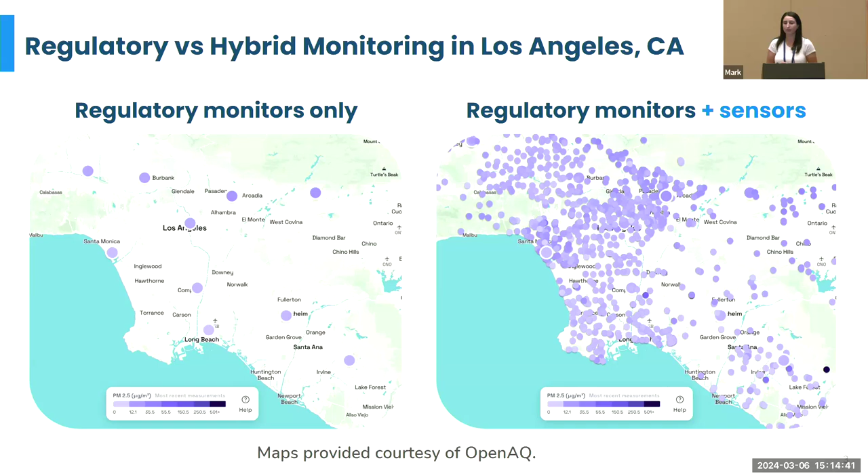So all of the variables here are extremely important, but in particular for airport monitoring, the big one that's important is the pollutants of interest. So a lot of low-cost sensor monitoring is very focused on PM2.5, which is one of many pollutants that are emitted from airports, which I'll talk about on the next slide.

But there are other variables to consider when you think about monitoring, particularly around airports. One is location feasibility. So do you have access to the site that you want to monitor? Is it a residence or a school? And who do you need to get permission to do that monitoring?

Budget is also a big one. Whether you're a government agency or a nonprofit, it is important to identify what your budget is, and that's going to help you determine not only how many monitors you can buy, but what pollutants you can actually measure.

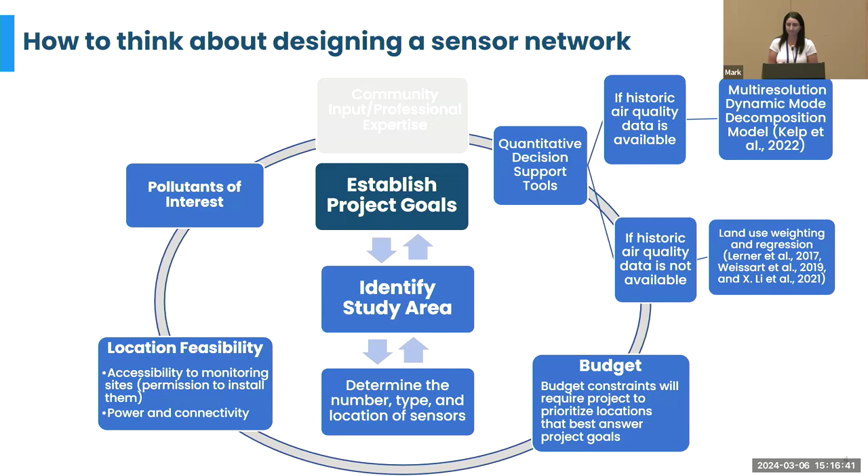So when we're thinking about airports, it's important to identify what the sources of the air pollution are from these airports. The most obvious one to everyone is probably aircraft, but when we're thinking about air quality as a whole, we also want to think about vehicular traffic, whether that's passenger vehicles coming in or any ground support equipment. We also want to think about any transportation on the runway and externally. And then you also want to think about any APUs, basically any type of units that are going to emit air pollution.

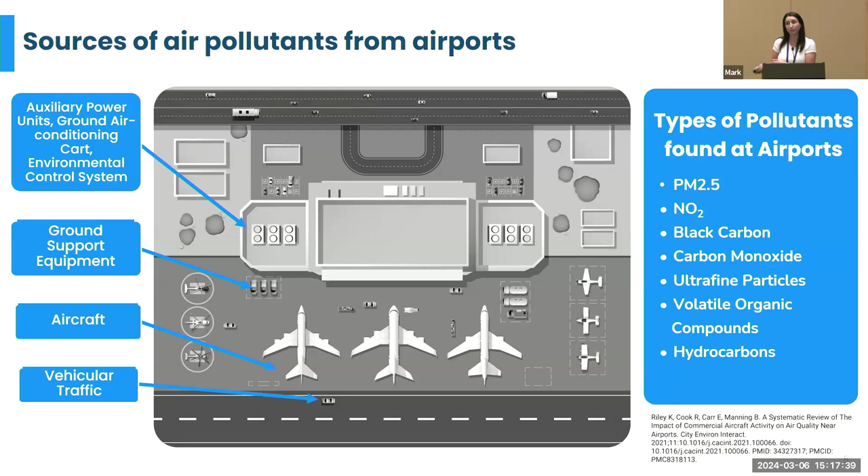So the company I work for is called Clarity, and one thing that we really work hard to do is make sure that monitoring technology is accessible and easy to deploy. So one other thing to think about when you're setting up a network is to make sure that the monitors are easy to deploy, you don't have to get a lot of permission to install them, etc.

And then thinking even beyond just the monitor itself, we've also thought about adding additional pollutants that are newer now, I would say, in the low-cost sensor space to monitor. As I mentioned on the previous slide, there is a very long list of pollutants that even Clarity doesn't cover that are being emitted from airports.

So some other things that we also include in our platform are wind modules. It's important to understand wind speed, wind direction, temperature, and relative humidity when you're talking about air quality. You want to know where it's coming from, where it's traveling to, et cetera. And then pollutants like ozone and black carbon are also important, because relying on PM2.5 when you might need to be monitoring black carbon is an important factor to consider.

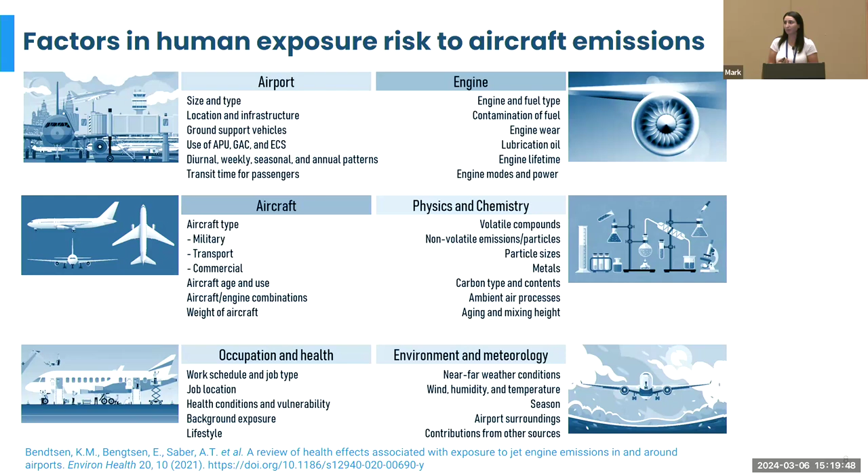And then I just want to finish off with some pros and cons of using low-cost air monitors for airports. As I mentioned earlier, this really increases accessibility to non-air quality experts. Having technology like Clarity allows community-based organizations to take matters into their own hands and really understand their air quality. The second one, as the name implies, low cost: they are absolutely more affordable than regulatory monitors, which can run in the tens of thousands of dollars range.

Low cost sensors run anywhere from in the hundreds to 10,000 range. So they're definitely a lot more accessible, and again, can allow for more spatial density, which is kind of the third pro of using low cost sensors. You can increase the density of your monitoring to see if there's any type of air quality gradient, right? Like maybe you set one up 100 meters away, 200 meters, 500 meters, and you can use that to measure how far out we're seeing the impacts, are we seeing them at the fence line, things like that.

There are a lot of cons still for using low-cost sensors. So the main one is pollutant types at airports. As I mentioned previously, there is a laundry list of pollutants that are emitted, and not all low-cost sensors can measure all of those pollutants. So we wouldn't want to set up any organizations for a disadvantage. So it's important to be very clear about what that technology is able to measure at this time and what it's not, because although a community may be concerned about what's being emitted at the airport, they might not be using the right technology to measure it.

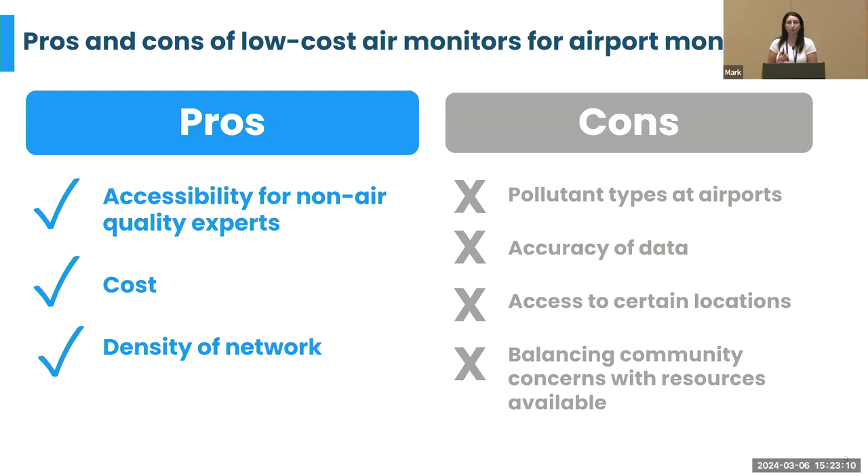And finally, the last one is balancing community concerns with resources available. I think all communities would love to monitor all the pollutants listed, but on a low-cost sensor budget, it's just not feasible to do that. And in fact, there isn't a lot of monitoring for all those pollutants listed that's reliable today, although it is a technology that is emerging. So I think it's important to make sure that we're balancing what the community concerns are and prioritizing those when moving forward in establishing project goals for doing monitoring.

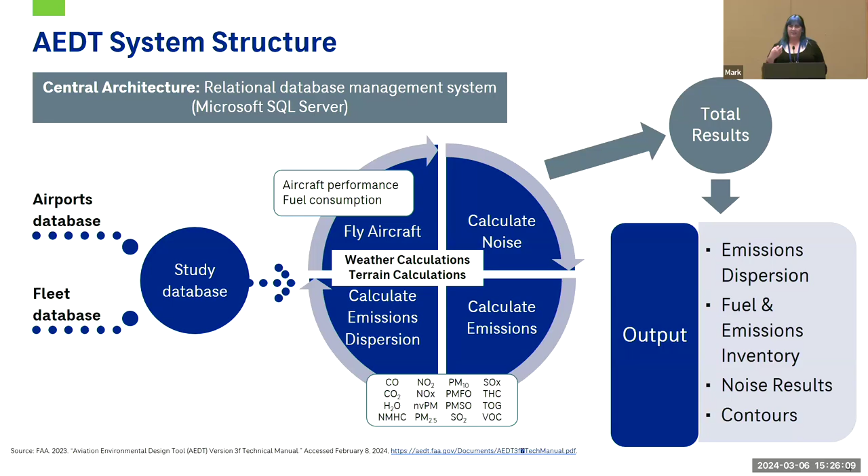So there are a lot of different emission sources at an airport. There's a couple things that AEDT can calculate internally, and that includes the aircraft themselves, the ground support equipment, which is anything that's running around on the tarmac to support the aircraft, and auxiliary power units, which are small onboard engines that help the aircraft operate the lights and air conditioning and other things while it's at a gate. It can also estimate emissions from stationary sources, such as maybe a boiler or a central utility plant to power the terminals, and then area sources such as a fuel farm.

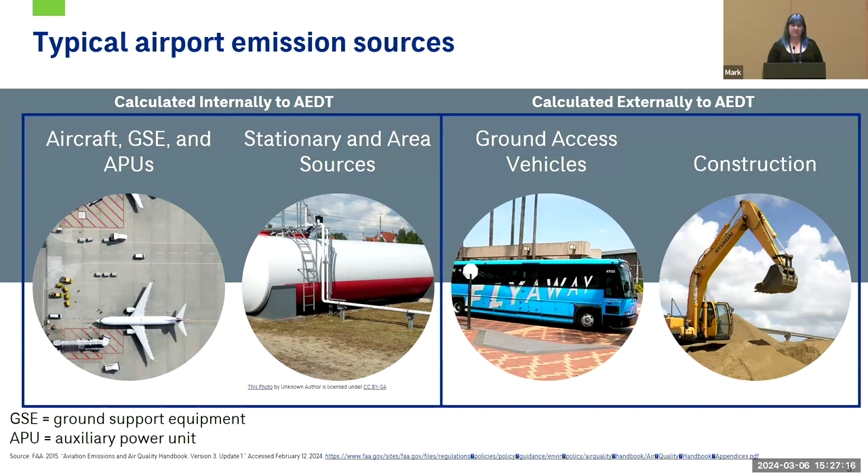What it cannot do internally is look at ground access vehicles, which is any motor vehicle coming in and out of the airport, such as shuttles, buses, passengers, or construction sources. However, you can use the EPA's MOVES model to estimate emissions from those sources, which can then be imported into AEDT.

So I keep talking about what is emissions inventory, and so I do want to spend a brief amount of time talking about what exactly is going into the model to actually estimate your emissions from aircraft. And it's a lot of data. But first and foremost, the most important thing, at least from an air quality or aircraft standpoint, is the actual fleet mix. And so you're actually telling the model the exact airframe and engine combination that you're flying, assuming it's within your database. You're also going to look at the number of operations, how the aircraft is flying, and also how it's moving around on the ground. And then also it's going to pull your non-aircraft sources.

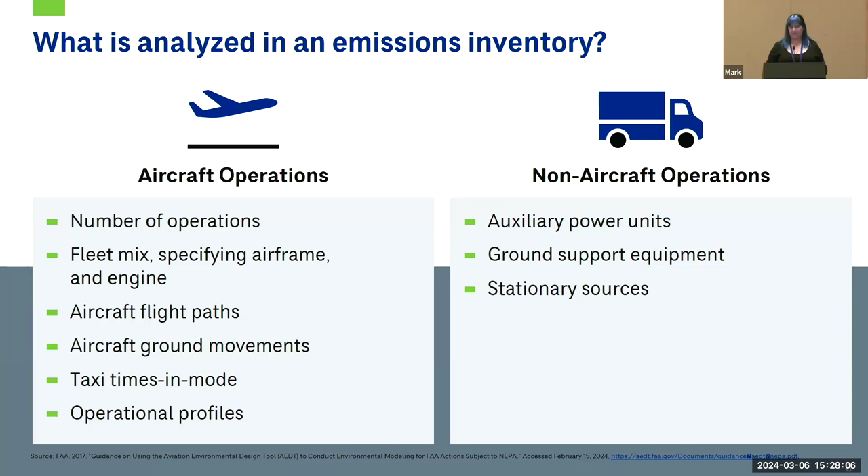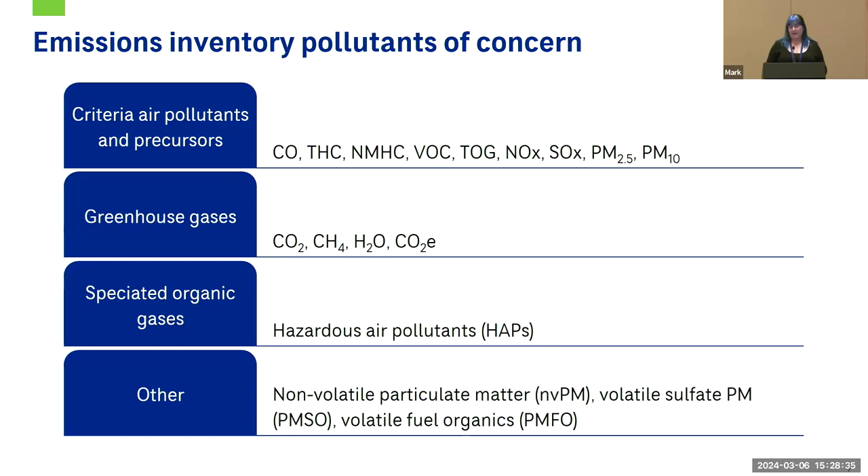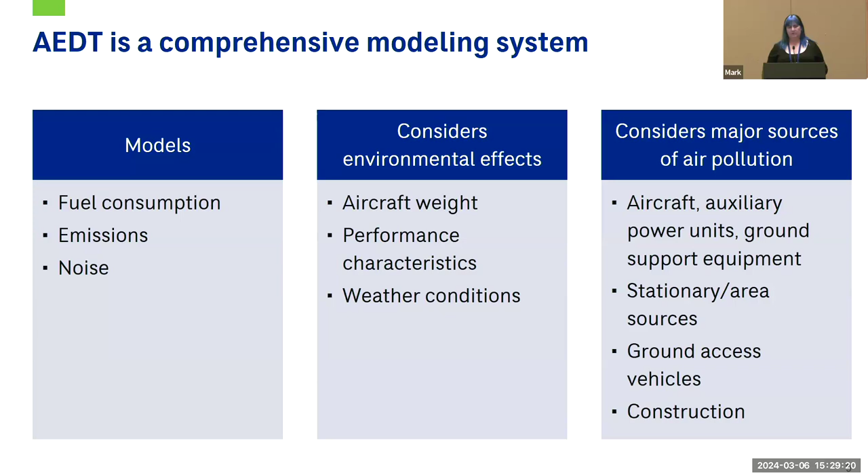AEDT helps with environmental review. If anyone is familiar with the laws called CEQA in California or NEPA, these are requirements to actually look at the environmental impacts of a project at an airport. And so AEDT can help you look at what the impacts of your project are, as well as any alternatives, and if you're compliant with the different regulations.

This was also mentioned briefly yesterday, but it does have some modules in it to look at both nearby environmental justice communities, as well as communities that might have limited English proficiency. And so it does help with communication and outreach. And because of this, it allows for informed decision-making from both the airport and any stakeholders and the community.

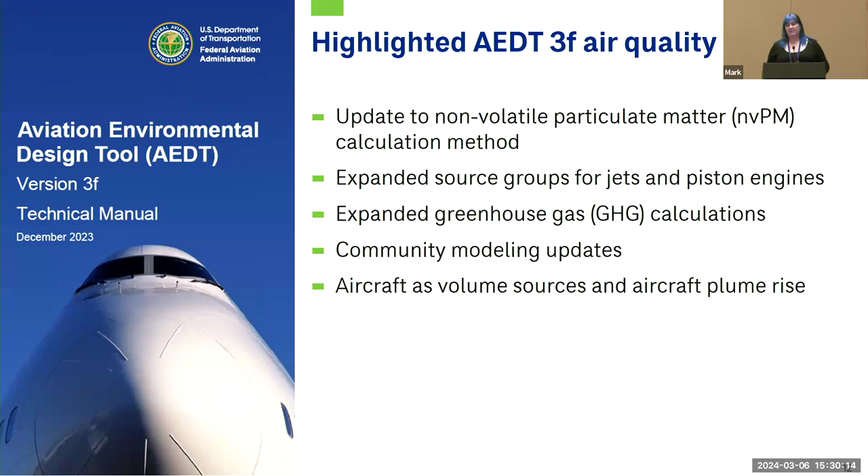So I do want to talk about some new features in AEDT 3F. One thing that may not sound interesting on kind of the outset, but actually is pretty important from a community standpoint, is when you're doing an emissions dispersion study, there's things called source groups. You're kind of lumping different emission sources into these source groups.

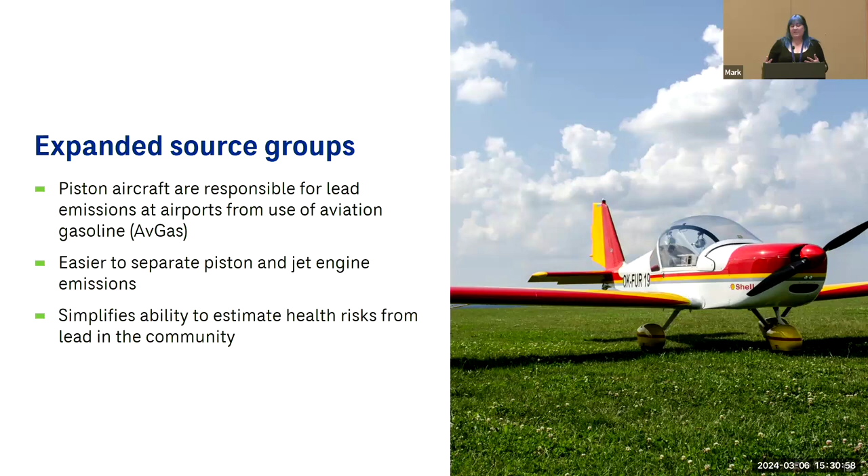And so it used to be you could only look at aircraft as aircraft. But now, with the current release, you can actually separate out your piston engines from your turbine engines. And this is extremely important because it's those piston engines that have your lead emissions. And so this just makes it a lot easier to be able to understand your lead emissions and actually look at it without doing a bunch of other calculations.

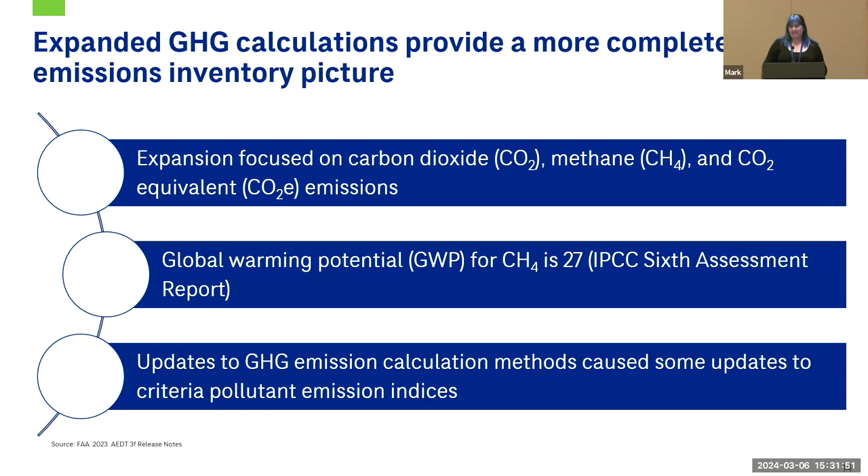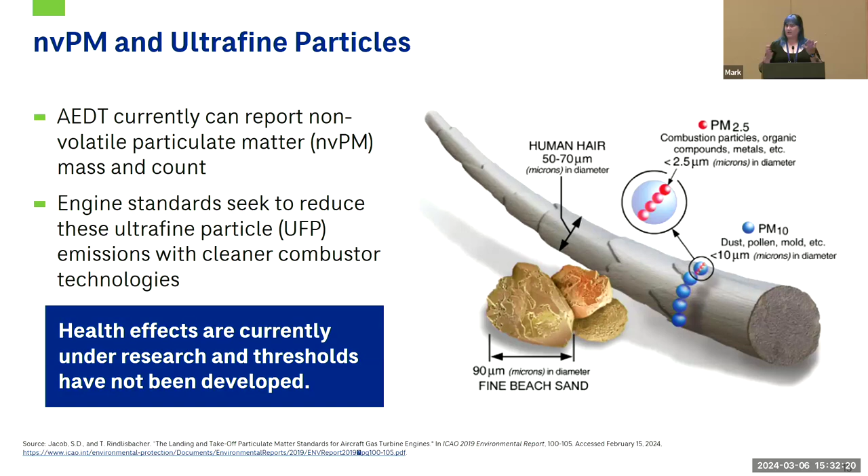Another thing it can do, and actually Kevin Lane's going to talk about this a bit more, is it can look at non-volatile particulate matter, or nvPM. So now it can actually estimate the mass and the count of UFPs. However, while it can give you this data, we don't really know what the health effects are. They're currently under research, and there are no thresholds for it. But at least we're kind of moving in a direction to look at it further.

And so, what are limitations? We just heard Maggie give a great speech on monitoring, and it's very important to understand that modeling does not replace monitoring data. You're looking at a theoretical model of just your airport itself. And so you're not capturing real world emissions, such as a nearby freeway or other emission sources like industry. And so it's possible that your modeled results may not replicate your monitored results. So it's just kind of important to keep that in mind.

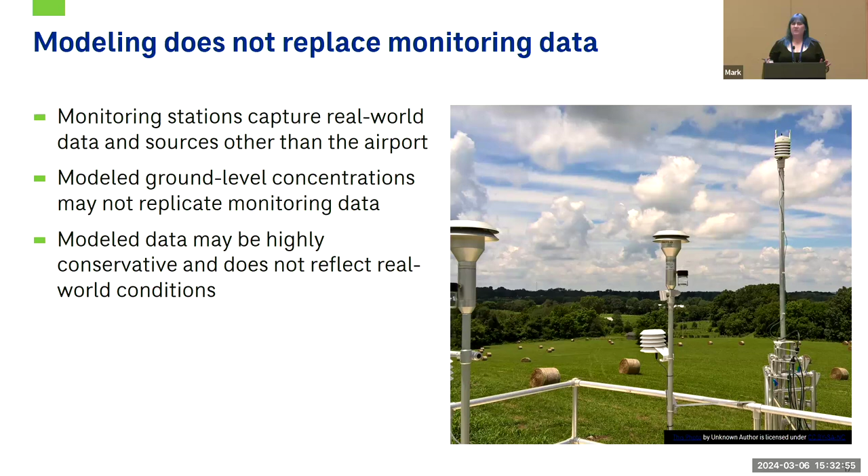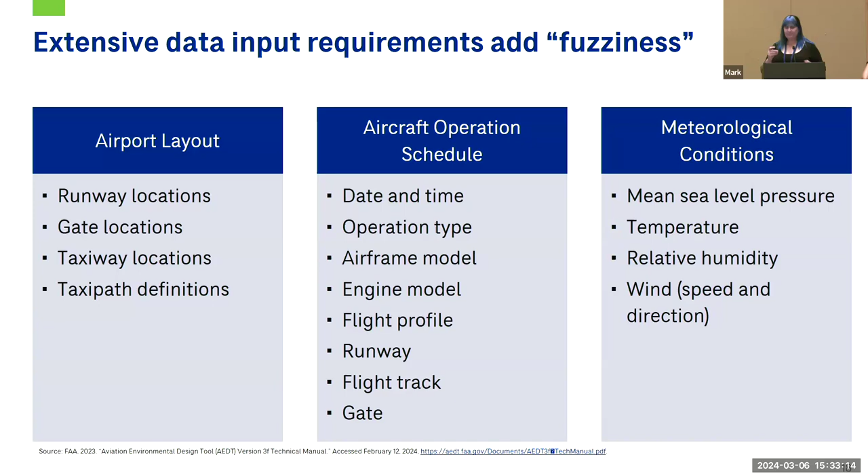There are a lot of data requirements. And so because there's so many different ways you can put in data or analyze it, these kind of slight tweaks might cause what I call fuzziness. There might just be slight variations in your inventory, depending on how the data is input.

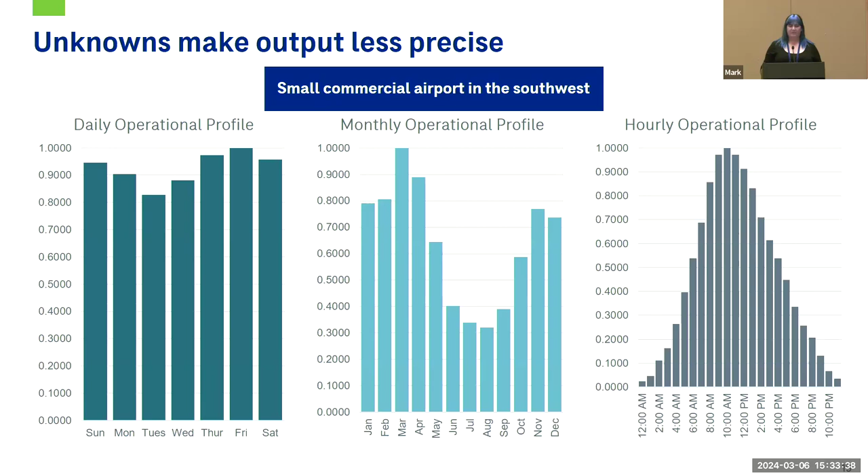There's a lot of unknowns. Often we have to take, say, a daily flight schedule and somehow turn that into annual emissions. And so one technique is to use these operational profiles, which is using historic information from an airport and kind of scaling it up to annual emissions. And so there's a lot of variabilities in that, and so it does make the data a little bit less precise.

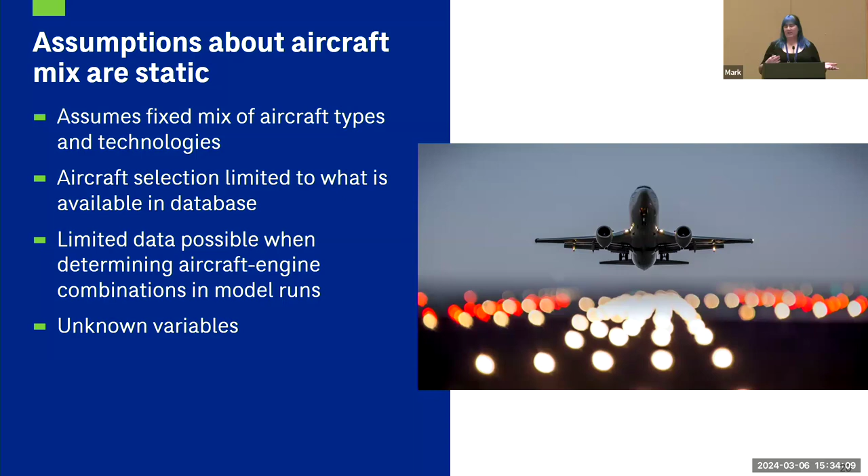The assumptions you put into it are static. Again, you're looking at a database and you're saying, I'm flying this aircraft so many times at this time of day. And so because it's kind of a static picture, there might be some slight differences in the real world. There also could be unknown variables, something like the grounding of the 737 MAX, that may not be captured by your model if you assume those aircraft are operating.

While it's a complex model, it is still simplified in the fact that you're basically looking at emission factors. It may not take into account some real world complexities. You might be having to take data from, say, another model like SIMMOD, which is an airfield simulation model, and somehow interpret that in AEDT. So that, again, is just one more kind of layer that could add some difficulty.

And then just the concept of data overload. There is a lot of data out there now. So understanding what data to actually use and how to simplify it and how to bring it into the model is one thing to consider.

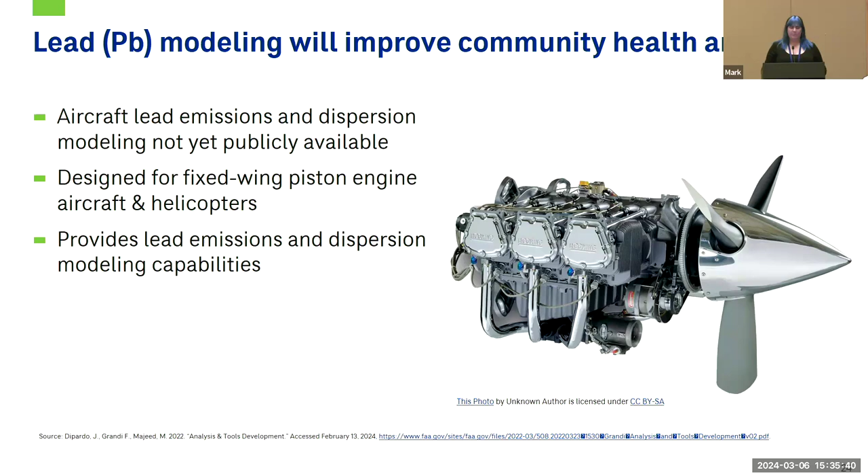And so this is my quick overview of AEDT.

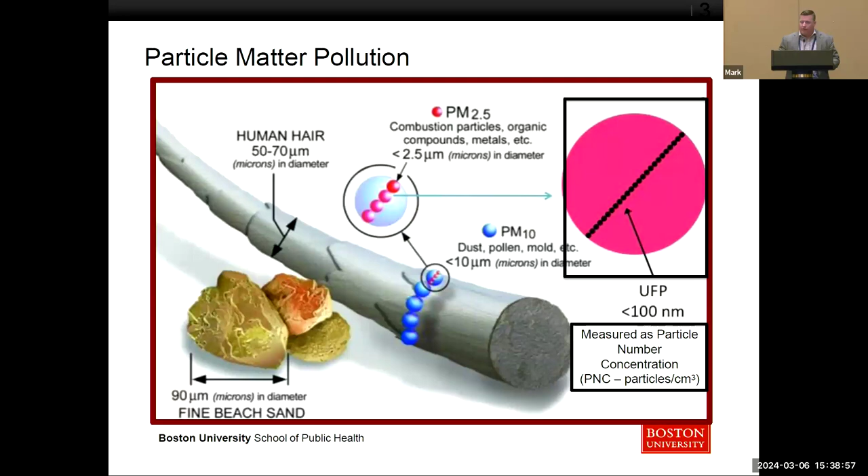And when we're talking about UFP, we're talking about less than 100 nanometers, and most of the health studies have focused on a total look at ultrafine particles, and just now we're starting to get into size distribution. I'm not going to be presenting on those results today, but I will be sharing some of the work we've done on total PNC. And that's also a unique piece, because we're thinking about how we could potentially think about future emissions standards and/or national ambient air quality standards. Thinking about EPA, the health studies are really focused on particle number concentration. The mass, especially in those smaller sizes, contributes really negligibly to a mass-based metric like PM2.5. So it would require a different type of thinking, but it also creates some unique challenges when we want to do monitoring as well as health studies.

Let's see. There we go.

Just to provide a little bit of background. Ultrafine particles are typically byproducts of combustion, have a large reactive surface, and are believed to be more cytotoxic than larger particles. There's also limited lung and systemic removal that can occur. The particles are so small. We heard yesterday, and I'll just reiterate it, the mechanism of action by which we think they elicit adverse health impacts is through an inflammatory response that can occur in the localized respiratory area, with increases in cytokines and C-reactive protein, but they have also been shown to translocate past the endothelial lining of the alveolar region and transport across the systemic circulatory system, deposited in different organs throughout the entire body, eliciting systemic inflammatory responses.

And that's some of the work that has been going on with my group as well as others, and especially the European groups have been leading on some of these areas as well. In terms of epidemiological evidence, until about 10 years ago, it was really minimal in terms of looking at a lot of health studies. And even today, if you look at the EPA's ISA reports that have been coming out, including the most recent one, it's sort of saying that there's just not enough health evidence to support the promulgation of a new ultrafine particle standard at this time.

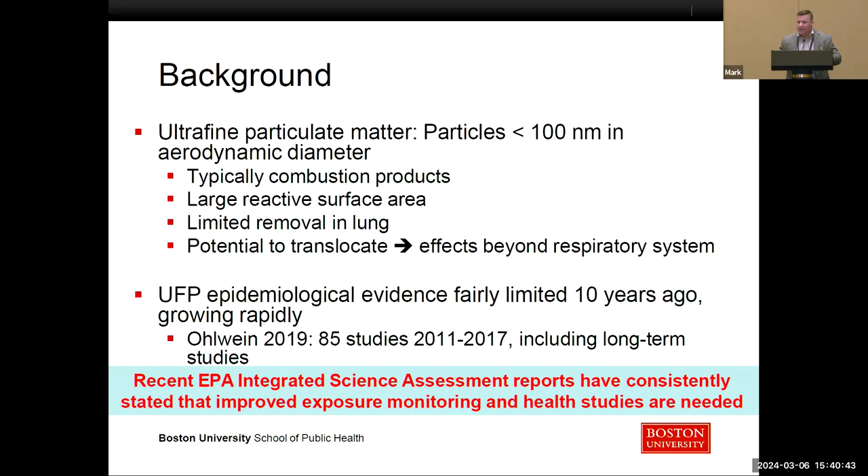Really, the CASAC, when they did their review, were saying that there could be cognitive impacts that could be more potentially on the pathway as suggestive. But when it comes to cardiovascular and respiratory related research, there's a lot of mixed results. There's consistent positive associations on the cardiovascular. On the respiratory side, it's actually quite mixed. And some of that can be due to what exactly the EPA has been saying, and we need more of, which is improved exposure monitoring, exposure assessment techniques, and more health studies overall.

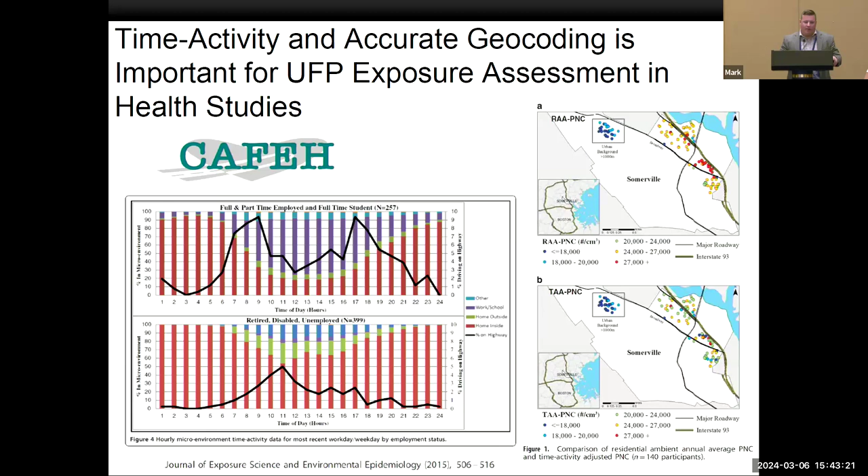The top box on the right shows you sort of a business as usual residential exposure that's typical of PM2.5, which works beautifully because PM2.5 doesn't have as much spatial variation. But with UFP, you're 250 meters away from the road, and if you're working during rush hour traffic, you're not exposed during those time periods. And the bottom actually shows the differential in this. Additionally, for those that have worked in geocoding or community projects, geocoding is really important. I've published a number of papers on the importance of geocoding and some of the inherent problems.

This is an example of how community-based participatory research enhances epidemiological health studies. By working with our community partners in the Chinatown area and Somerville as well, we're able to pull out public housing. Many cities, similar to Boston, put their public housing right up against major roadways and other high exposure areas. A lot of centralized public housing, especially in Massachusetts, has single site address locations. That's not where the people live, right? In most of our public housing, there are multiple blocks, so you would have a lot of misclassification.

We refer to this as exposure misclassification in health studies, and the reason why I'm bringing up both of these is because if you're thinking about in the future planning to get into a health study, we're seeing not just here, but in other studies in Europe, it's really important. Even if you're just talking about roadway, this could be the difference potentially between seeing associations or not in ultrafine particle-based research.

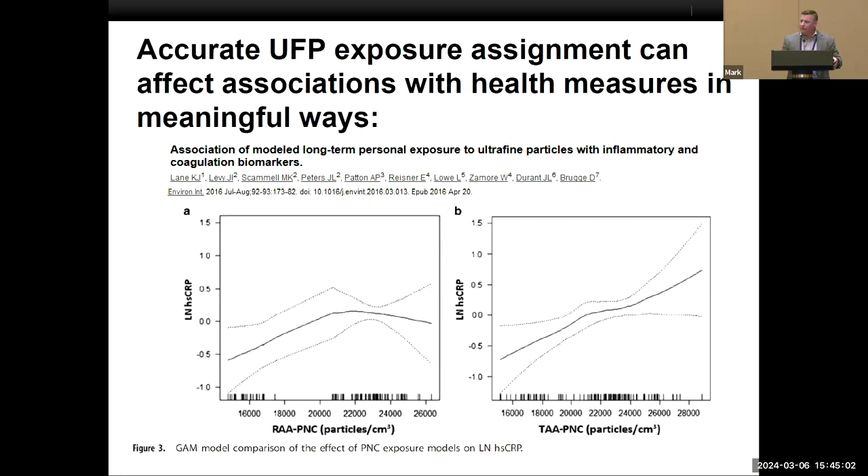We've published a dozen papers, some with and without the time activity. When we use time activity, we actually see associations. When we don't, we don't. This could have some other proliferations in the field as well. So when you're looking at ultrafine particle health research, you want to consider these as a key element. And we know that's going to be important for aviation.

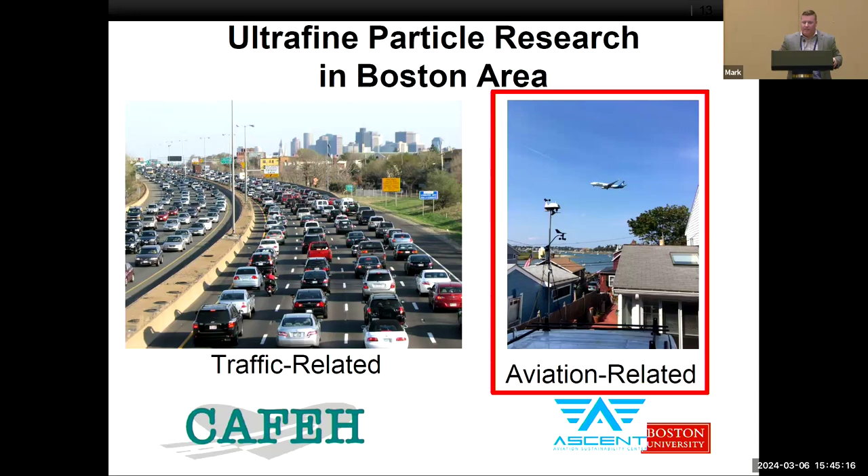Roads, we have a clear distinction time period, especially in areas, high traffic, low traffic, of when we can identify people. Aviation, it's not as clearly timed always. It's timed, especially in a complex airport like Logan Airport, where you can have some of the different LTO and different configurations of patterns be very different. So when it comes to community measurements of aviation emissions, that's our ASCENT-based project.

What we've been doing is starting in 2020, collecting ultrafine particle data along each one of the major LTO arrival or departure pathways where we can collect multiple years of ultrafine particle, NO2, and other data sets as well. We're doing stationary monitoring. We're using condensation particle counters as well as some size distribution using TSI's FMPS as well.

Roads are pretty simple. You get the perpendicular with a little bit of dispersion, but we need to be able to start doing some plume chasing to help improve that algorithm related to the dispersion characteristics of in-flight contributions, which is really our study question: to quantify the in-flight and ground-based flight contributions in these communities while pulling out the traffic piece overall, so we could distinguish between the two.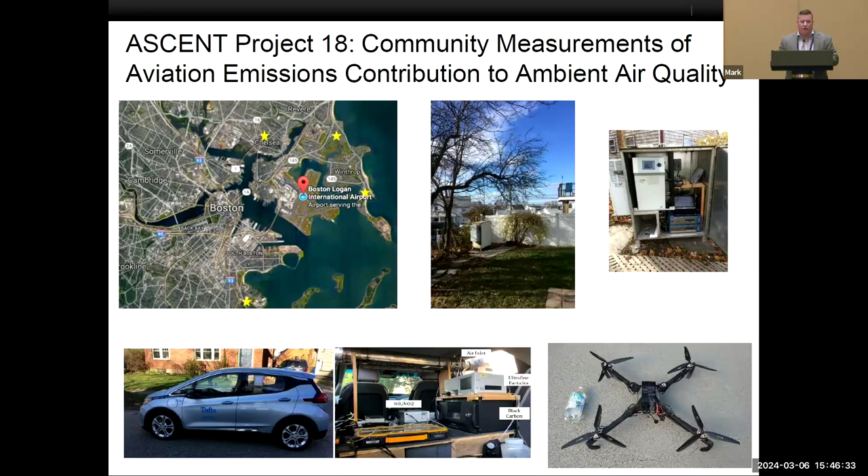Before we started the project, there were some initial shorter-term studies by Neelakshi Hudda, who's now a part of our team, with John Durant, showing the relative importance of wind direction, wind speed, hour of day, and the diurnal patterns. So this is sort of proof of concept of where we were monitoring already and how important it was.

And you heard me say we started in 2020, what's the big issue? The COVID pandemic. So we actually wrote a scope of work that wasn't designed to deal with the pandemic, but we actually took advantage. I think understanding climate and air pollution impacts is one of the things that comes out of this pandemic, hopefully the only one in our lives, that we can actually do a natural experiment with.

Cars were taken off the roads, like you can see in the example here by Hudda et al. in 2020, which examines the first few months when the state of emergency was put in place, with the dip in different modes of transportation by 50 or 60%, and a corresponding PNC relationship. University of Washington published a similar paper, Steve Larson, that does a longer time trend on road UFP.

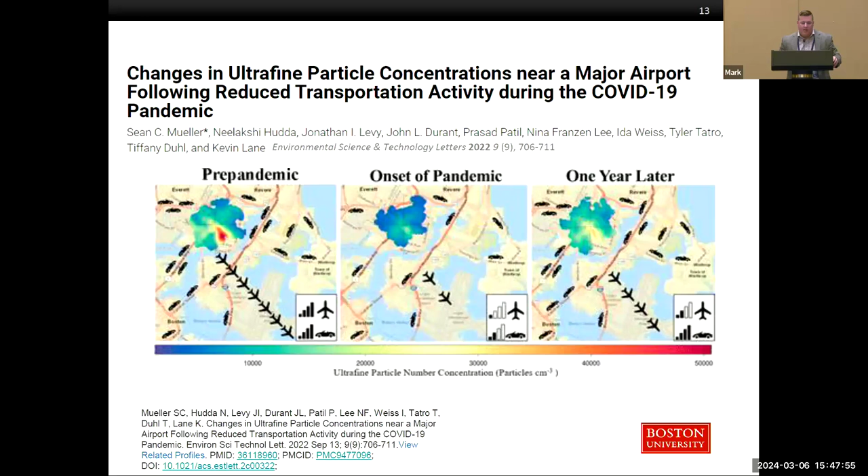We published 2 years ago, as my doctoral student, Sean Mueller published one of his dissertation papers, which is a multi-year comparison at 18 months of COVID-19 as a natural experiment to examine ultrafine particles impact pre-pandemic, during the state of emergency, and after 1 year later. And what you see here is a time series.

Because we've had a number of different studies, the red line indicates the PNC difference from background, which would be the pre-pandemic time period. But the red line indicates the intermittent phase. Even with a study in Boston where we've been collecting ultrafine particles, we'd have about 10 years of continuous data. It's really difficult. Again, it really speaks to the importance of having long-term sites near sources so that we can get an understanding. As soon as our study started in March, we sprinted right out and got the monitors up and running so we could collect this data. We've been collecting it through 2023. So we've captured the entire change overall in time.

And what we actually see in the bottom line there is the pre-pandemic time period, the state of emergency when roads dipped down to approximately 50, 60% and started coming back. But aviation at that time was well below 20%. In the 2021 time period, it only came up to approximately 60% of its return. It didn't really return until almost the summer of 2022, back to close to approximately 100%. We have continued this analysis out to be able to see the differences overall.

What we observed, if you look carefully at our wind-rose pollution plots, is that that cone, which would be our impact sector when planes would potentially be impacting the community in that area, you see that really high level. When the roads and the aviation are removed, you see a rapid reduction in both. Interestingly, when roads are coming back, the aviation is still minimal. The mean and median of what we're seeing is pretty stable. That tells us a lot about peak exposures from aviation and what's contributing. Roads could be driving the mean, which means that the health studies that are focused on annual average mean might also be missing the aviation.

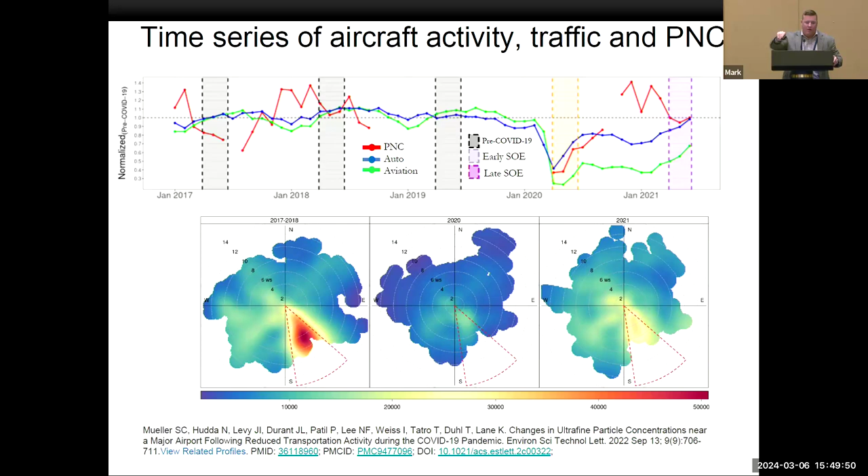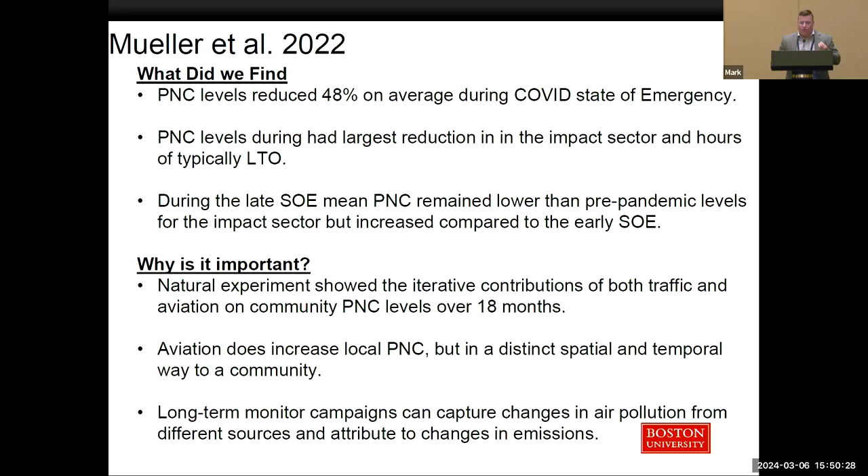One final thing I want to share is our spatiotemporal regression models in one of our most recent papers, where along the arrival path that's most commonly used into Logan Airport, we collected data in 2017 by my chair, John Levy, when he was running the study before I took over, and were able to develop spatiotemporal regression models for this. We were able to build a robust model at the mean and the 95th percentile to see the differences. We actually saw stronger associations when examining PNC at the 95th percentile for our flight activity measures overall.

And what you're seeing here is when the arrival aircraft are over 30 per hour, so high frequency of flights coming in, there was a significant increase in our sites N1, N2, and I1 that you see here in the corresponding map. In the first one, there was an 11,000 particle increase during that time period compared to when there were no flights. There was approximately 9,000 in I1, and at the N2 site approximately 6,500, indicating the arrivals' extra contribution to the communities when there's an exposure.

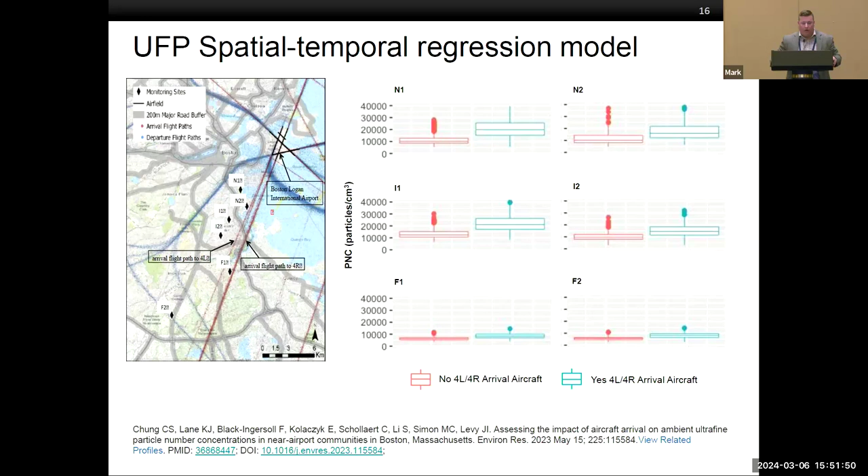But again, this actually represents in our study only 20% of the time. So most of the time people have low exposures, which means if we aim a health study the way it's currently being done for PM2.5 and other air pollutants at a mean or other exposures, it might not match up.

We're looking at higher exposures in those peak ranges, and hearing a lot about the noise has really started to make me feel a little more confident, like these are peak exposures under specific time periods of impact. Overall, what we found is really important is that we can model the contributions and quantify them at the mean and at higher exposures, and we're now starting to use machine learning to improve our models.

These models range between approximately R-squares of 0.42 and 0.56. Our new machine learning models are substantially more robust overall, but they're seeming to come within each other's confidence intervals for accuracy. In terms of summary, contributions to aircraft UFP, really complex overall.

We need more research. Health studies need to account for multiple sources, so not just the unique properties around exposure assignment need to be taken into consideration, like time activity, but also similarly noise, other factors, other air pollutants as well. And current approaches to assign exposure to these air pollution health impacts might not be sufficient at this time either.